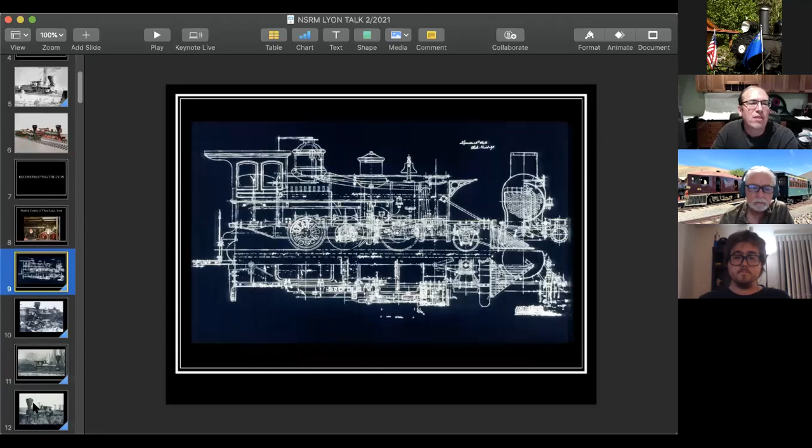Since the Lyon was built by the Union Iron Works in San Francisco, one problem we ran into, of course, was the 1906 Great San Francisco earthquake and fire. That destroyed the Union Iron Works plant, and all but this single drawing of the Lyon from its construction paperwork were destroyed. This drawing is currently in the collection of the California State Railroad Museum, but it's been an invaluable artifact because it actually has dimensions for all the main parts of the locomotive. It's got a plan view so we can see how all those parts looked, and it gave us the main guide for reconstructing the locomotive.

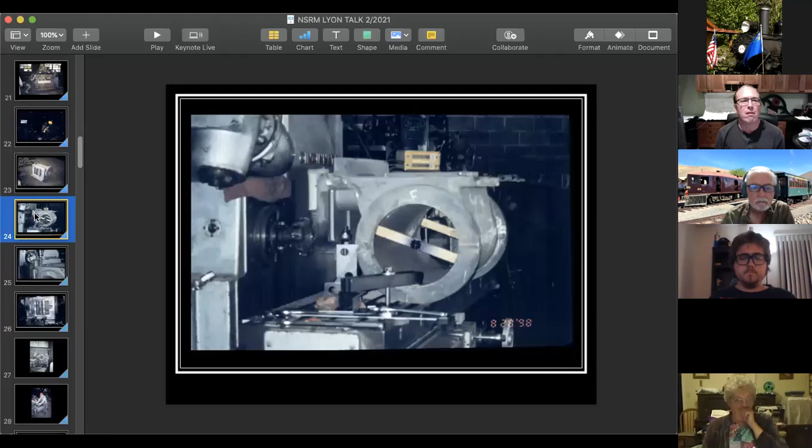All machining refers to is the process of using a large machine to cut away unwanted metal and to make it into a more finished surface. So here you see one of the Lyon cylinders attached to a machine to help face off one of the sides that bolts onto the Lyon's frames.

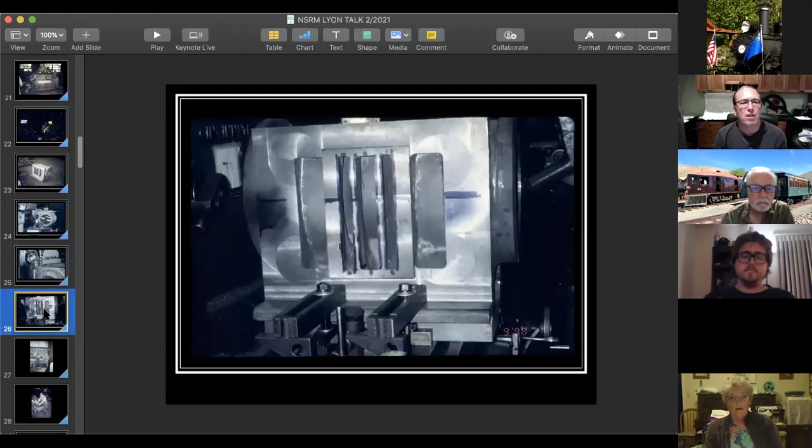What's depicted in this photo is an end mill. This is probably about 1.25 inches across, which is kind of like a drill shaped tool, but it's made out of very hard steel and is able to cut away the softer gray iron on the cylinder. This shows the top of the cylinder where the valves are going to travel after it's been machined. So you can see in comparison to the rough casting, this looks like a much more finished product.

Well, in order to bore out the inside of the cylinder, that is going to have to be spun. The tool is going to be steady and the piece is what's going to be rotating. So if you'll notice on the plate that the cylinder is attached to, there's actually some chunks of lead that are attached to the side. And that's to act as a counterweight so that when this piece is spinning, it doesn't actually vibrate the machine into bits. And it makes it steadier so that the machining will be finer.

So once all the machining is complete, one of the last steps in assembling or manufacturing the cylinder is called lapping. So on the top of the cylinder, a valve is going to go back and forth. And that valve is going to admit steam and release exhaust. It's very important on a steam locomotive that that be a tight seal between that valve and the top of the cylinder where the valve ports are.

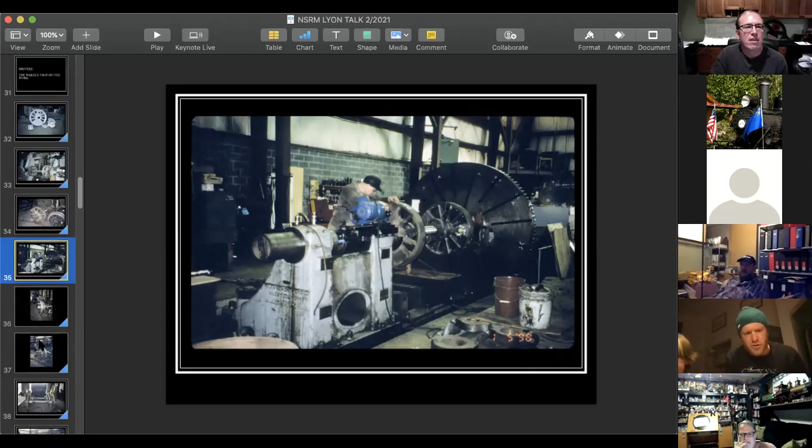Another important part is when you have these wheels pressed onto the axle, they have to be what's called quartered. There's a crank pin off the center of each one of the wheels that the rod's attached to, and those rods transmit the motion of the piston to all of the driving wheels, in this case all 6 wheels. So here the center axle set is in a lathe, having the crank pins quartered on the drivers.

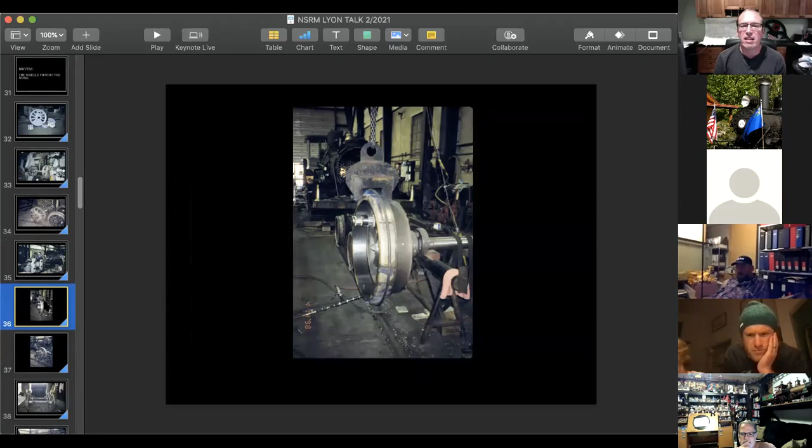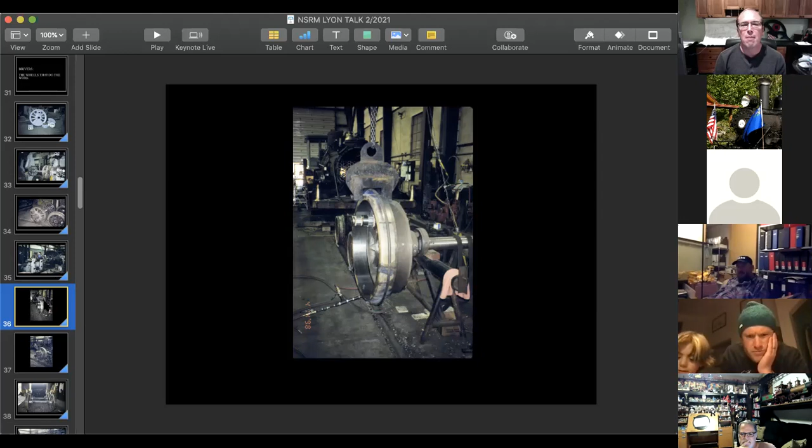Now, you probably also noticed that there were no flanges. A really important part about a railed vehicle is it's got a flange to keep it on the tracks. Well, since the wheels are cast out of gray iron, which is strong but not very hard, if you had a gray iron wheel rolling down a steel rail or even another iron rail, it would wear out really quickly. So the way steam locomotives are built is there's a tire, but unlike a rubber tire, they have steel tires. The steel is much harder than the gray iron, and that's put on in much the same way as the wheel onto the axle.

But rather than using a press, it's very common to use fire. Think about when something gets hot, it expands, and when something's cold, it contracts. So the way tires are applied to steam locomotive wheels is there's a gas ring. You can see a little bit of the blue flame that goes around the tire, and then the wheel is kept cold. The tire expands by heat and it's slipped over the wheel, then it's clamped in place and it cools, and then it shrinks onto the wheel and makes a very, very tight fit.

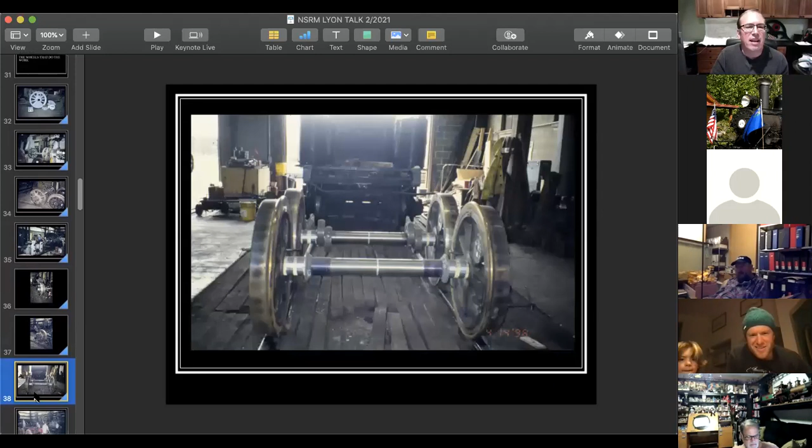So here we see 4 of the 6 Lyon drivers that have their tires on them. And now this is a photograph that shows all 6 of the drivers. These are brand new, back in January of 2000, and they're being united with the Lyon frame, cylinders, and cylinder saddle for the first time.

So all these wheels are not connected in this photograph, but what does connect them are rods, and those rods attach to the crank pins through something called brasses. And the brasses on the Lyon are unique. They're actually a very bad design.

They have covered ends, which in 1869, everybody thought was a good idea because they thought it would keep dirt out. So the Lyon's purchase contract specifies that all of the rod brasses will have covered ends. The reason that's a bad design is that in a normal steam locomotive, there's going to be wear on those brasses, and there'll be wear on the Lyon's brasses as well.

Normally you would just drive a wedge and it would push the brasses together and take up the wear. But you can't do that on these brasses without taking them off the locomotive and machining away a small sliver of those caps, because it's the caps that keep the dirt out and keep the two worn pieces from getting snugged up closer together.

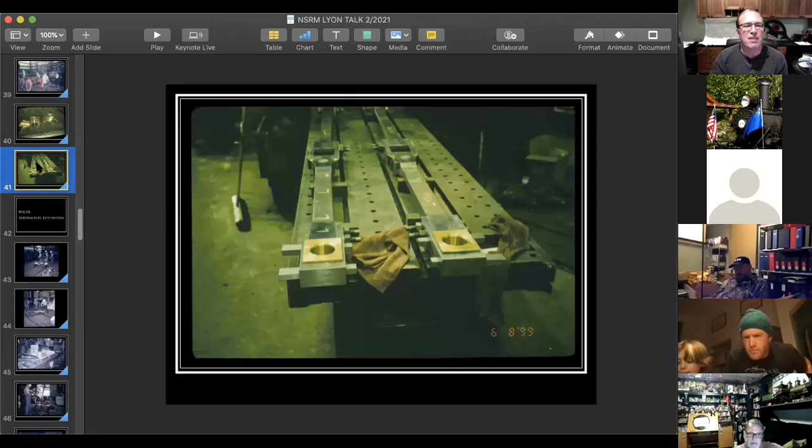Here's a photograph of the Lyon's rods as they're being manufactured, and you can see those brasses in the foreground of the photo, but they're upside down. So the covered part is facing the table and the open part is facing us.

Another really interesting part of the locomotive is the boiler. A boiler is pretty complicated in shape. It's got a round part in the front, and then for an early locomotive like the Lyon, it's got a square part in the back. That's the firebox portion, where you burn the wood in the Lyon's case and heat the water.

The round part is very easy to make. There's a machine called a roller that can shape flat metal into a round shape. But when you make the transition from the round part to the square part, it requires a lot of handwork.

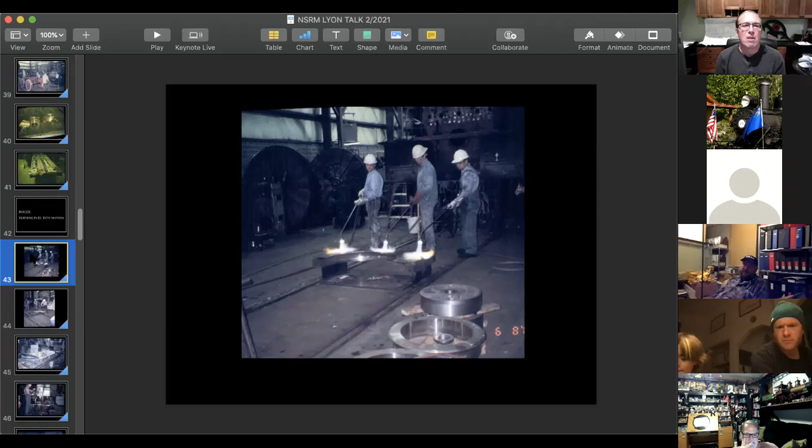Here we see some of the workers at the Strasburg Railroad using gas torches to heat up metal to form that transition piece, called the throat sheet. They have to first make a mold for what they want the shape of the finished piece to be. They then heat it up, and then they beat it with sledgehammers. It's just through brute force.

Other parts of a boiler, even though they may be flat or round rolled, still require a lot of handwork because a boiler is under a lot of pressure. The steam pressure for the Lyon is about 130 pounds per square inch. Even though the boiler is made of thick steel, it still has to be held in place so that the power of the steam doesn't overcome the strength of the steel.

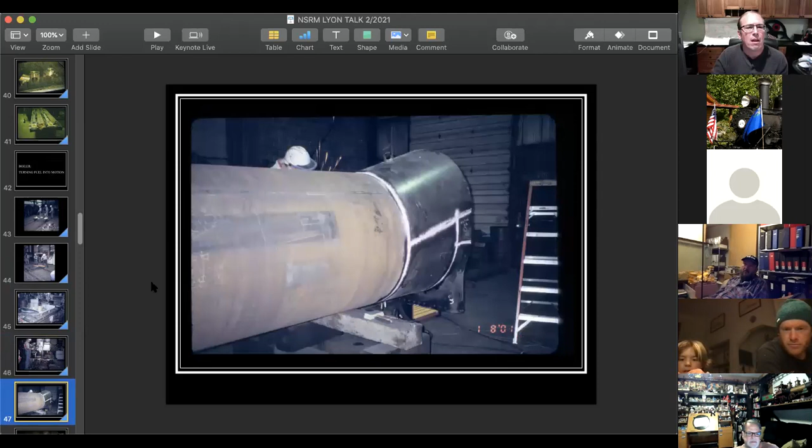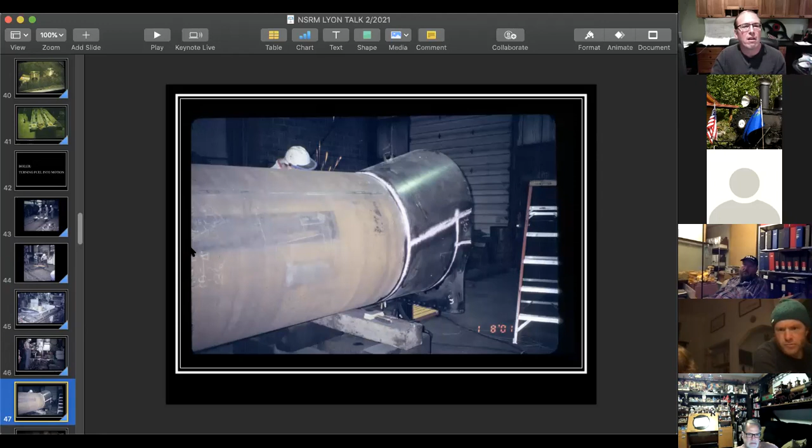Here we see our transition piece attached to the round part of the boiler. This is all a big transition, what we call a course. A boiler has a front course, a transition course, and then a rear course where the firebox is. So all these parts are being assembled.

Unlike the original Lyon, our new Lyon's boiler is welded. The original Lyon's boiler would have been riveted together, but it also would have been largely out of sight. It's a lot more cost effective and in a lot of ways safer and stronger to have this modern welded construction. So we decided wherever the boiler parts are going to be exposed, we will replicate the rivets, but the boiler construction itself will be modern welded steel, though it will look to somebody as though it's like the original.

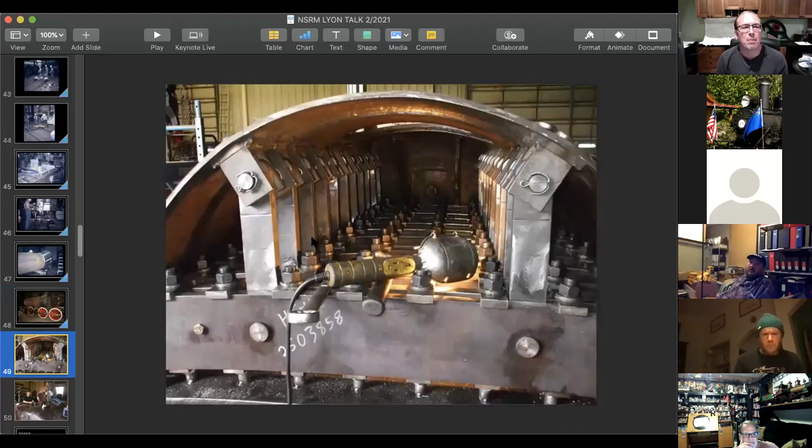This photo of the boiler is missing the firebox portion. This depicts that firebox portion after it's being installed on the boiler, shown as a cutaway view. We know from the original Lyon contract, and from the Lyon drawing that survived the earthquake, that it used an uncommon type of construction called crown bars.

What the crown bars do is they strengthen the top of the firebox. As you can see in this photo, you've got the round top, and that round shape provides a lot of strength just by virtue of the fact that a circle is such a strong self-supporting figure. But the top of the firebox, seen at the bottom of the photograph, is flat. So it uses essentially a truss made out of steel to brace that top so that it doesn't collapse against the pressure of the steam.

As you can see, it's an extremely labor-intensive process to make that. There are literally hundreds of parts that had to be made from scratch to make those crown bars and to make a construction type that would be just like the original.

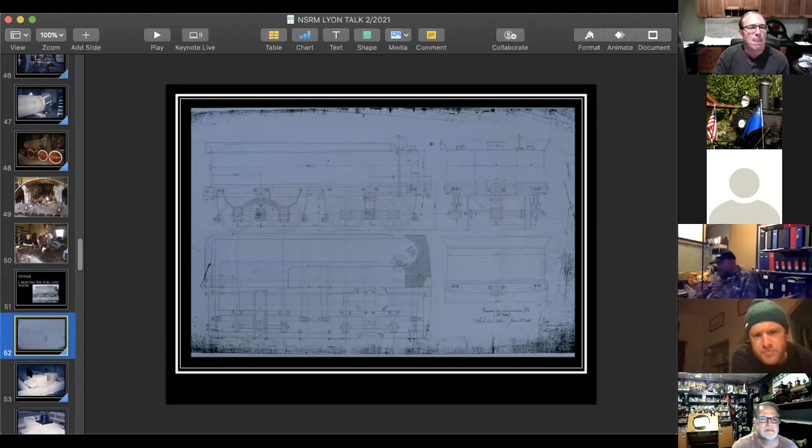But as with the original Lyon's tender, this reproduction has a wooden frame tender. And there's a really great story behind the wooden frames you see here. These are actually all oak timbers, and they were cut in a steam-powered sawmill in Iowa.

Stan Gentry was building this with his family at their home in Iowa, and they used the local steam-powered sawmill to cut the timbers. So these timbers were hewn out of logs in much the same way that the original Lyon's tender timbers would have been hewn.

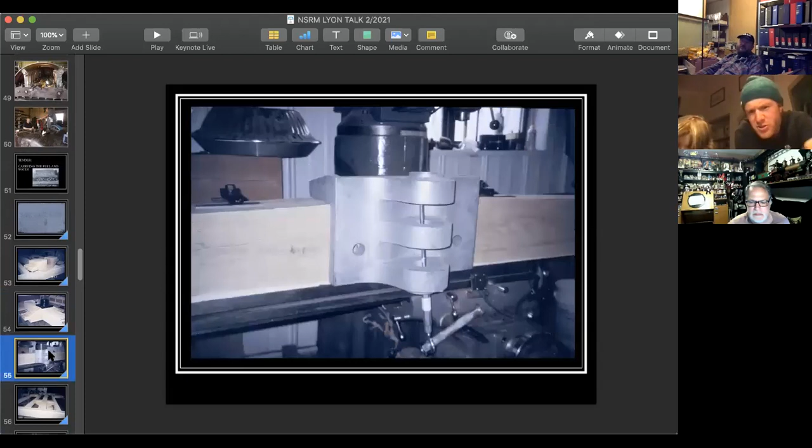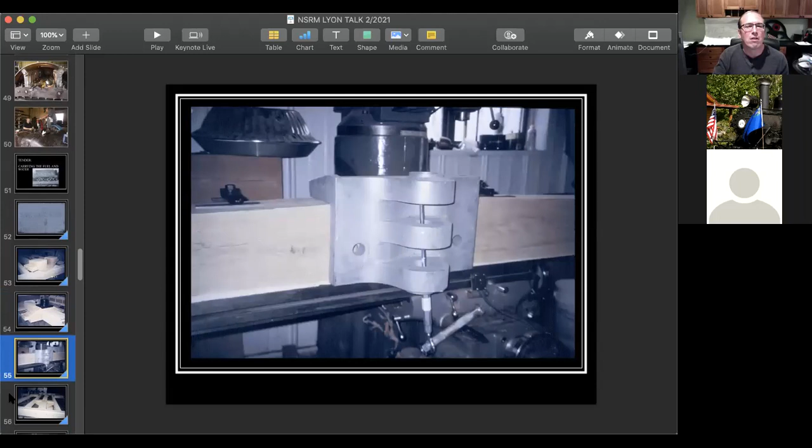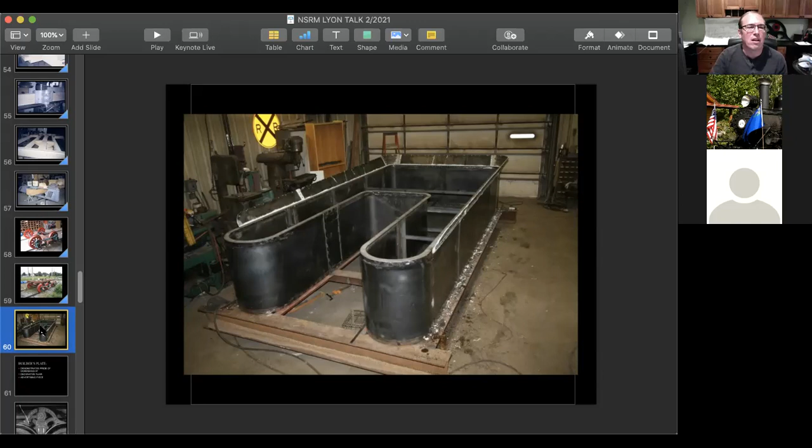I think my favorite part of the locomotive was the first one that I got involved in personally helping to make, and that's the builder's plate. The builder's plate is a part that doesn't serve any useful function. It really serves as something that advertises the builder for all the world, shows their pride of workmanship, and serves as an advertising piece for the quality of their products.

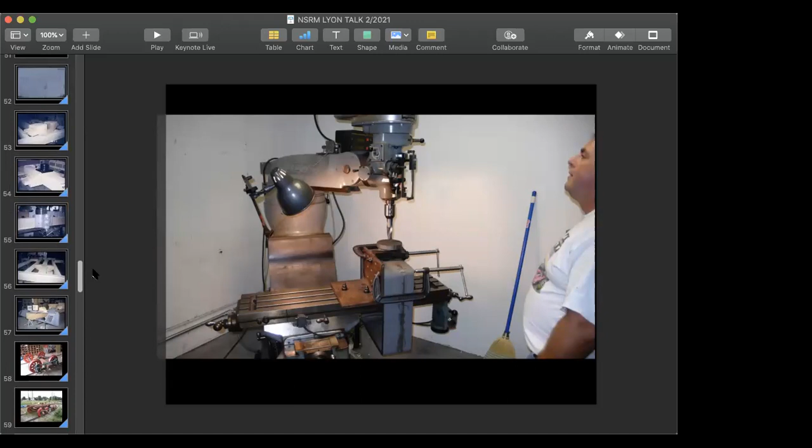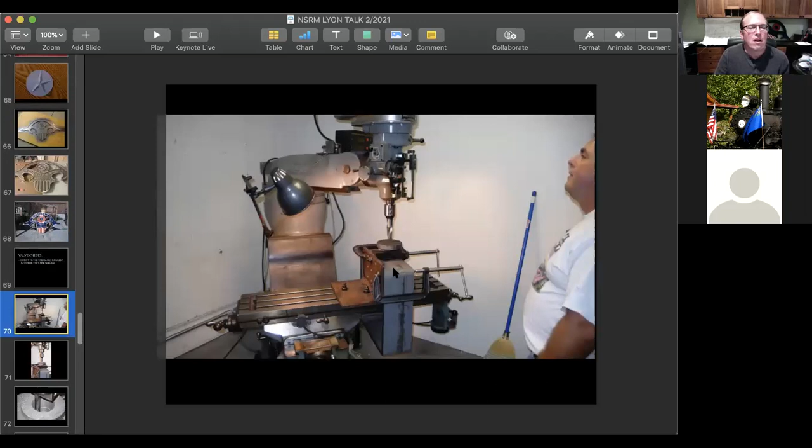So let me scroll ahead here back to the photos. So here's our cast valve chest on the mill, getting the hole drilled for the stem that guides the valve, so that it can pass in and out. The motion of the valve is back and forth, so you need to have a hole for that rod that moves the valve.

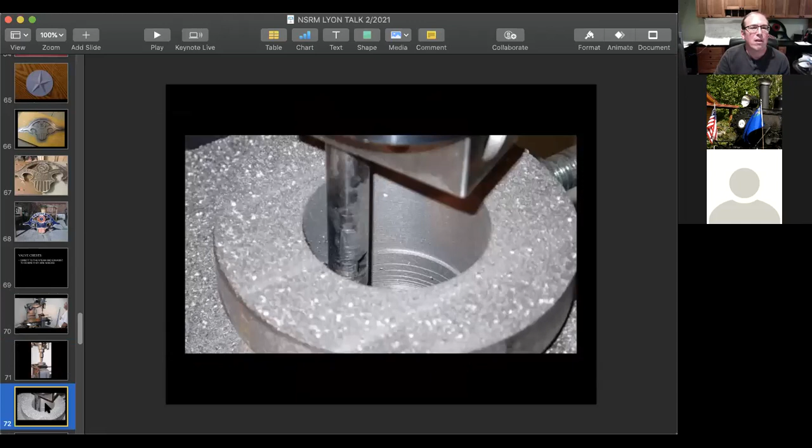And then here we're using a boring bar to make a drilled hole bigger. This is a really labor intensive, slow process. You're taking about 5 thousandths of an inch off at a time, so that hole is getting ever so slightly larger with each pass.

And then when that hole was made, we are here carving a channel for the gasket. Today we have a lot of materials that make great gaskets - they're composite materials, a lot of times with a paper base with composites added, and it's really easy to make a new gasket by cutting it out. In the 1860s, they used copper for making gaskets.

Copper is a metal that, once you heat it up through a process called annealing, becomes very soft and pliable. So here we're cutting a little channel around the top of the valve chest for a quarter inch rod of copper to rest. That'll be annealed, and then there'll be a top plate that goes on top of this chest that gets clamped down, and that copper will squish down and make a steam tight seal.

So we drilled that hole in the valve chest. We need to have a packing gland for that valve to go through. What a packing gland is, it holds a rope-like material around the stem that's moving back and forth to keep steam from leaking out.

So in order to keep the steel rod from wearing out against the iron packing gland, we machined softer bronze linings that will press into these parts, and they'll allow those linings to wear out - which these linings are not that hard to make, but the valve stem is very hard to make.

So we want to wear out the easy part, not the hard part. Here you see the final assembly of the packing gland in the valve chest. You see we press that bronze liner in place, and now it's ready.

And being proud builders, we left our mark inside. We have a little machine shop down in Burbank that we jokingly call the California Locomotive and Iron Works. So we stamped our name and the date that we did the work, and V&T Lyon, on the inside of the valve chest. Nobody will ever see it, but we'll know it's there.

When I think of the Lyon, I think the most remarkable part of it is that enormous smokestack. And when I got involved in the project, I pretty early on decided that I wanted to be part of making that.

The patterns for the base of the smokestack made their way to my home, which at the time was in Southern California. And I searched around for a foundry that would be willing to cast a one-off piece for a steam locomotive, being this base for the smokestack. So here it is, in my little tiny crossover utility vehicle. I think this piece weighed about 500 pounds, so my suspension was probably pretty close to bottoming out at the time.

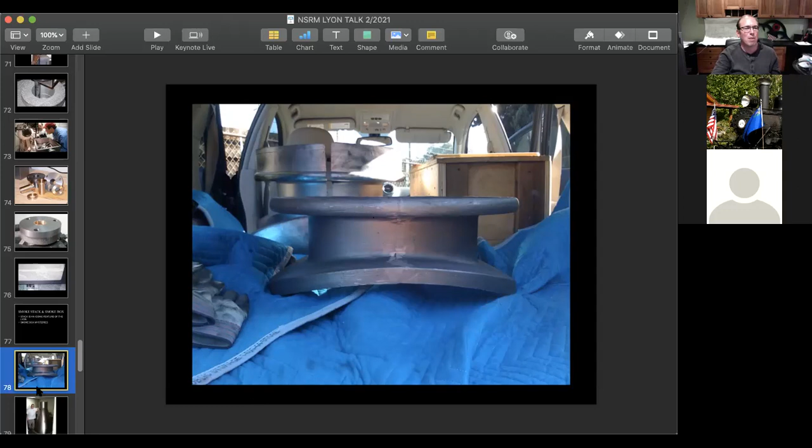But the major part of the smokestack is the sheet metal. I think when you're going to build a smokestack, probably your biggest fear is that it's going to come out crooked. And if you were to build the smokestack right side up, it would be really hard to make sure that you had everything concentric.

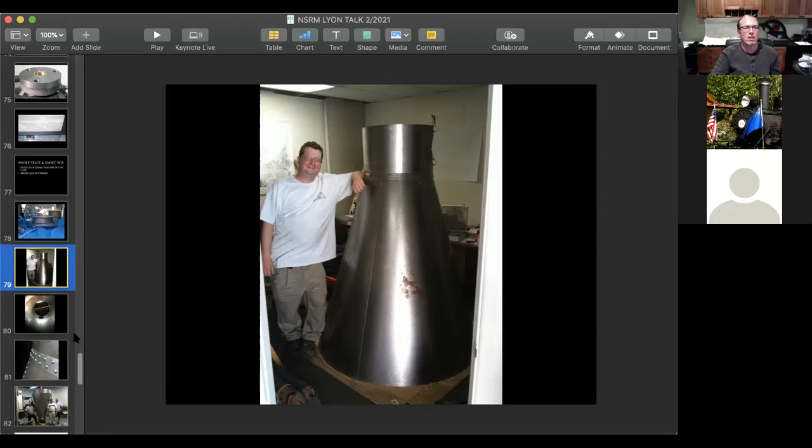So you've got the bottom part, which is the widest, or the top part, which is the widest, and the bottom part, which is the narrowest. The way we did it was we drew a circle that we could line up all the metal to, and then another circle for the top. Then we hung a plumb bob from the top piece to the center of the bottom circle, and we could make sure that the two circles were exactly concentric, so the smokestack would not be crooked because the circles weren't concentric.

Then we had to hand drill every single rivet hole on this. Once we had all the pieces correctly in place, we hand drilled out all the holes. And then the way the riveting process works is you install a nut and a bolt in every single rivet hole. When you're ready to rivet, you withdraw the bolt and the nut and place the rivet in. Then one guy is on the outside holding the head of the rivet in place, and another guy is on the inside hammering over the head of that rivet so that it makes a solid joint.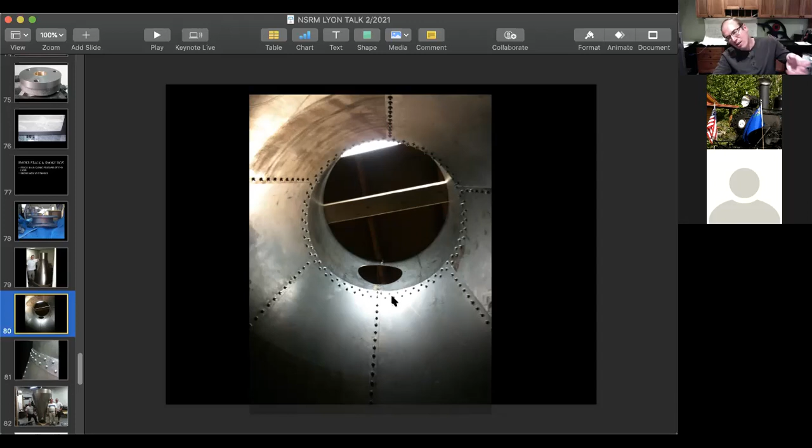That was pretty easy when we were working on the upside down bottom part of the smokestack. But when we worked our way to the top, which was the bottom for our construction purposes, the guy on the inside had to be turned upside down and hammering upside down in order to turn over the rivet heads. So here you can see those rivets. I don't think we ever counted how many rivets are in this smokestack, but I would say we probably spent 3 or 4 months worth of weekends and weekday nights drilling holes, bolting them up, and then hand riveting every single rivet on that smokestack.

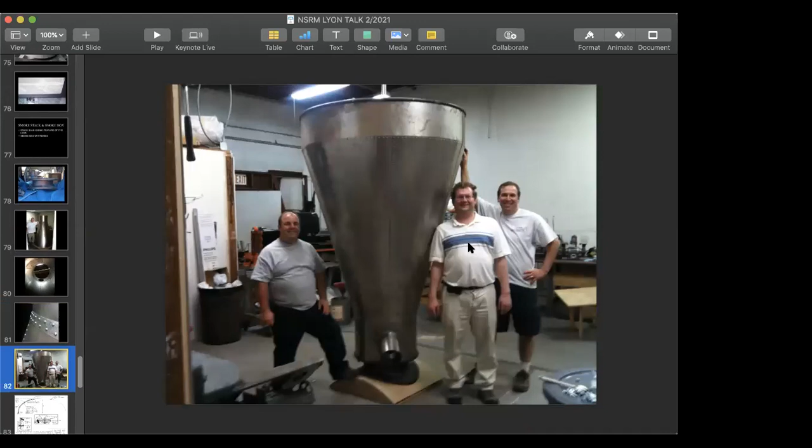And this is me and my friend Rob Lamont and Rory Hawkins standing next to what we are going to die claiming is the world's largest steam locomotive smokestack. So there's not a Guinness Book of World Records on it, but we're laying claim to it.

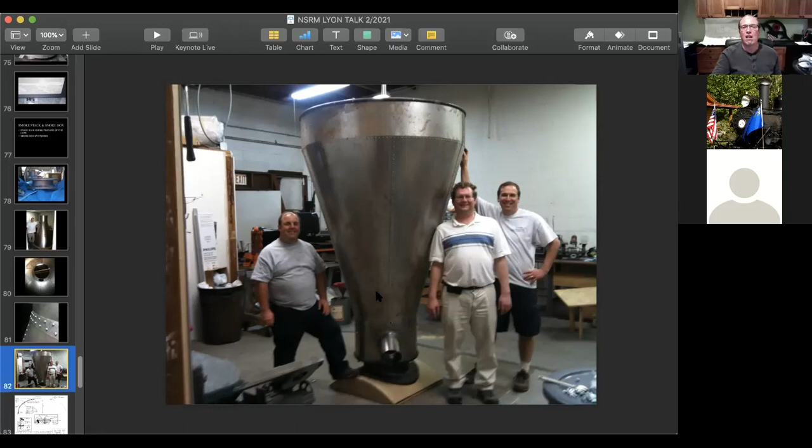Now, I learned that there are a lot of parts to a smokestack that you cannot see from the outside. And since we were building an operational locomotive, we had to build those inside parts. There's actually another smokestack inside of this one, which is a straight tube, and on top of that is what looks like an upside down sombrero. So when smoke is being ejected from the inside smokestack, it hits that sombrero, and all of the cinders that are a fire hazard come up, hit the sombrero, and go down, collecting inside this big funnel. So this is a giant spark arrestor, really, in essence, but on top of it is kind of the last ditch effort to keep burning embers out.

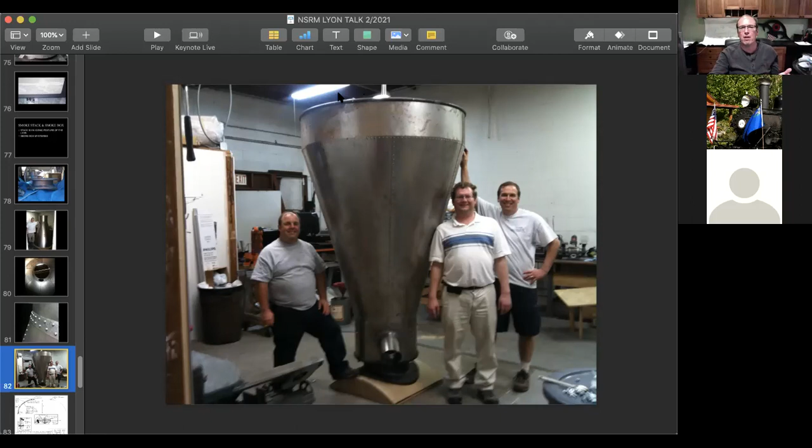There's a big piece of screen, so we had to design that. This is my hand-drawn plan for how we were going to construct the screen for the Lyon. There are some tricky parts which we drew details of so you could see how the various components had to go together, because we're dealing with really small spaces where we don't have any room for error. You really have to think every single part through very carefully.

We are not locomotive geniuses, so we rely on other examples of locomotive construction. The prototype we looked to for the Lyon's smokestack top was the Glenbrook's smokestack, another locomotive at the museum. The Glenbrook's original smokestack screen is actually still at the museum, and we made drawings and a careful study of that, and used it to design the new one.

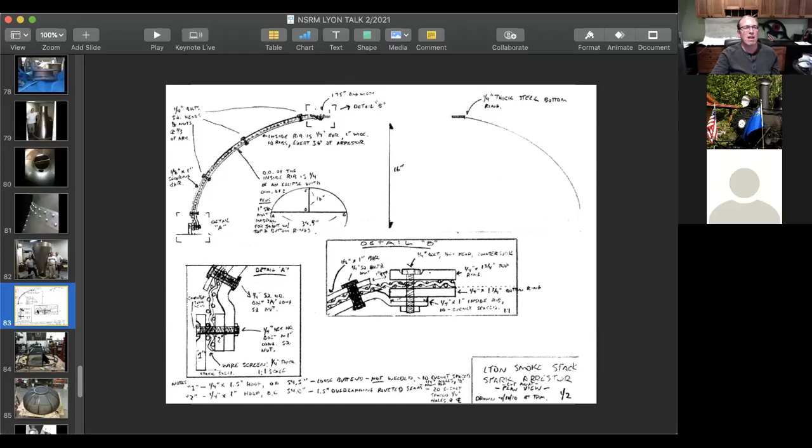One interesting part is, in talking to Chris DeWitt, we discovered that if we ever wanted to run the Lyon over land controlled by the federal government, there's actually a federal government standard for what size this mesh has to be in the screen. So thank goodness we learned about that before we built the screen. Now the Lyon has a completely federal government compliant smokestack.

So we explored: what did other Union Iron Works locomotives built before Lyon have for the front of their locomotives? We discovered they had fancy fronts, just like the locomotives that came in the year or two after the Lyon was built. We then dove through the available Virginia and Truckee maintenance records, and discovered that the Lyon underwent major repairs a couple of times, one of which was due to an accident that greatly damaged the front of the locomotive and in fact swept off the smokestack. So we were able to conclude that more likely than not, Lyon originally had the fancier front seen in other Union Iron Works locomotives, but due to an accident later in its life, it was replaced by the Virginia and Truckee with a much more plain front.

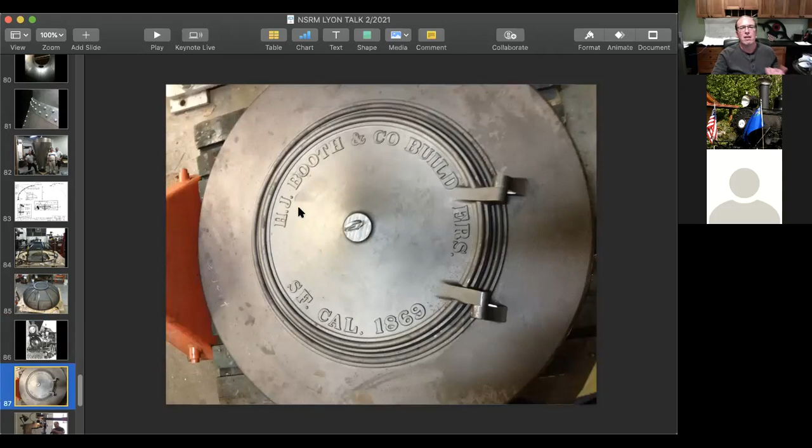As a result of that, we came up with this design. These are actually the castings we made. This piece is huge, about 4 feet across. This door is very, very heavy - I think the casting came out too thick, to be honest, but we're looking at several hundred pounds of metal here. Just as we saw in the other ones, it would have said H.J. Booth and Company Builders, with the place and year of construction on the bottom.

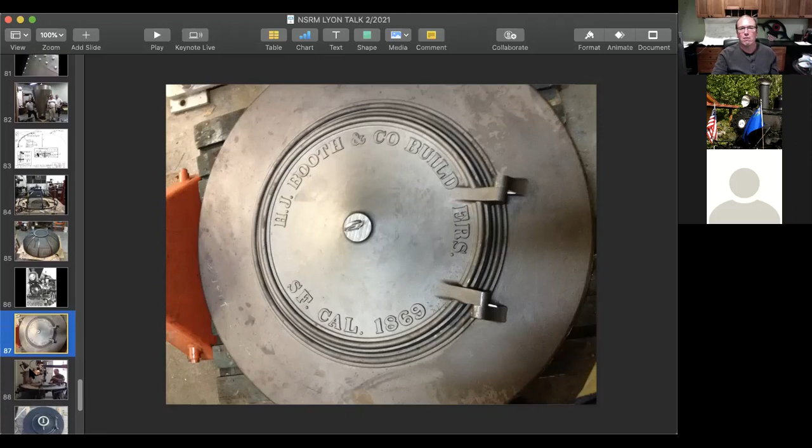It actually has a handle on the bottom with a mechanism hidden behind the number plate. You turn the handle and a locking mechanism turns, withdrawing prongs that lock it against the smoke box ring around the outside, so that you can swing the door open.